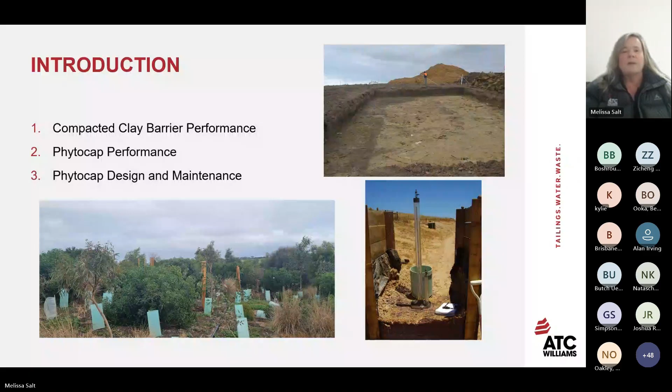Before I start though, one thing I wanted to do was to make sure we're all talking the same language when it comes to the soil water balance. So most terms are the same, so precipitation, evapotranspiration, runoff, soil moisture storage, those sorts of things. I also talk about lateral flow, which is basically the horizontal flow that occurs within the profile, and that's often caused by a change in pore space relations. So that's the term that I've got here.

The other term that I tend to use is drainage, so that D factor. So drainage also gets called things like percolation or bottom flux or those sorts of things. But basically, it's the moisture that leaves the cover and enters the underlying waste, so whether that's tailings, whether it's rock, putrescible waste or contaminated soil. So I tend to use the term drainage, or you'll also see percolation used as well.

I tend to reserve the term infiltration to basically just mean the moisture that enters from the air-soil interface, so not to confuse that with drainage, okay? So throughout the presentation, they're the sorts of terms that I'll be using.

So I'll start with compacted clay barriers. So final covers for containment of waste are often based on a barrier system to prevent the moisture leaching contaminants into the environment. The assumption in the design is that the barrier stays compact over time and that a barrier system is the best method to prevent moisture movement into an entombed waste. However, 25 years ago, this was proven to be a flawed assumption.

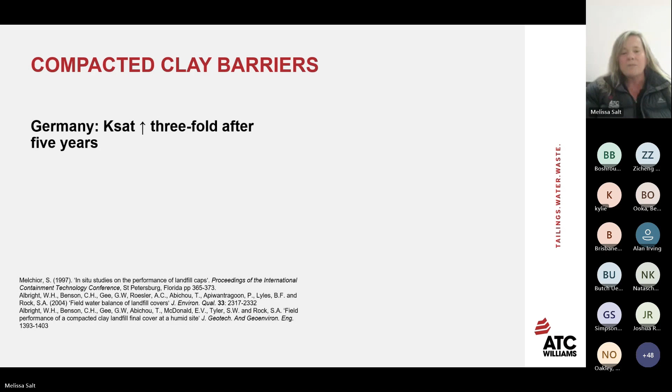So both of those were in humid regions, and both had drainage of 52 millimetres and 195 millimetres per year. So that's equivalent to about 6 to 17% of the precipitation received. Excavation was done of the Albany cap about 4 years after construction, and they found that the hydraulic conductivity had increased by about 3 orders of magnitude. They also did dye tracing studies and some structural analysis as well that showed extensive cracking and root development throughout the entire depth of the barrier layer.

Now in Australia, I actually repeated some of those tests. So the Australian Alternative Cover Assessment Program was what I did my doctoral thesis under, and that commenced in 2006 and looked at both compacted clay barrier caps and phytocaps over time. So I actually ran a series of box trials, so large apple boxes. They're about 1 metre by 1 metre by about 2 metres tall.

And I looked at the soil hydraulic changes over time, and they can occur due to, say, changes in dry density from compaction and settlement, pore size distribution changes, and particle aggregation and disaggregation. Both the Phytocap and conventional cap were planted to native grasses in this trial, and after 11 months, roots were noted to over 1 metre's depth, which means they'd penetrated into the compacted clay barrier layer.

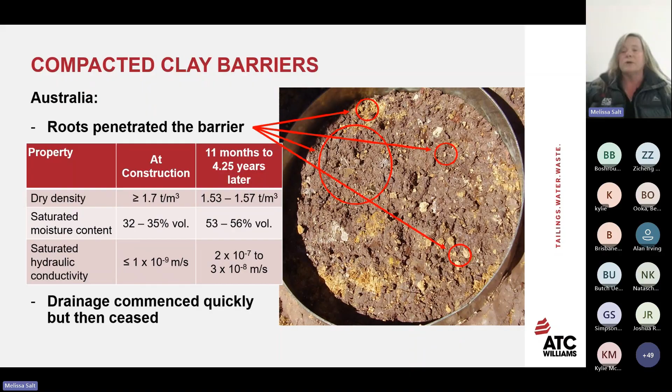These are actually combined with field trials that we did. So the field scale trials included 10 metre by 20 metre non-weighing lysimeters. One of my trial sites was based in Adelaide, and it included 600 mil compacted clay with 900 mil of growing medium over the top. From 2007 to 2014, the rainfall varied from about 360 mil to just over 700 millimetres a year.

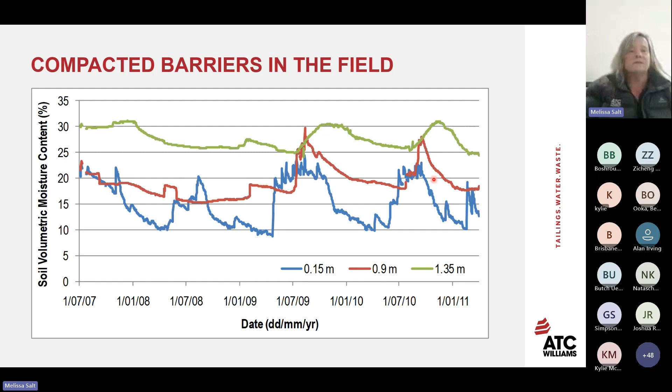So at this point here where it started to dry, the roots actually hadn't extended to this point. You can tell that because this probe here that's at 900 mils depth, that's basically sitting on top of that compacted clay barrier, that shows no sign of roots accessing moisture. But you can see by sort of the middle of 2009, so about 2 years after construction, that roots had started to get to this level and were actually drying at that point as well.

Whereas in the following year, the top of the clay actually wet up more slowly, most likely allowing any cracks that had formed to have actually sealed. So it wouldn't have allowed any preferential flow through.

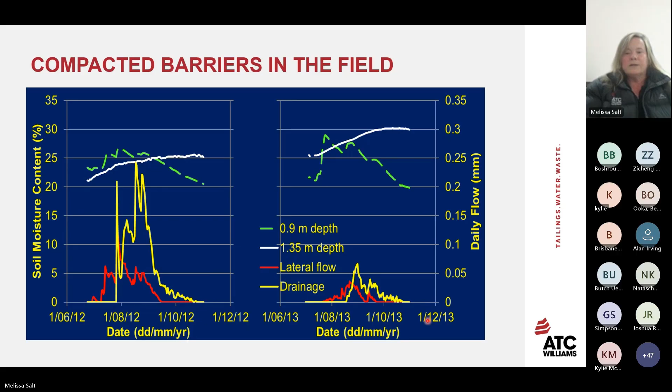In 2012 and 2013, lateral flow actually commenced before drainage, but drainage still occurred in both of these years. Now in 2012, more drainage was reported than in previous or subsequent years, even though the rainfall was actually only 462 mils in 2012. The major difference is that you can see that this compacted clay barrier is now below 25% moisture, whereas in all the previous and subsequent ones, it actually was above 25% moisture at the beginning of winter. So overall, the drainage from the conventional clay cap actually exceeded the Phytocap in both of these years.

So one thing that's obvious from both the overseas and Australian research is that the clay barrier has changed since it was placed, and this has resulted in worse than expected performance.

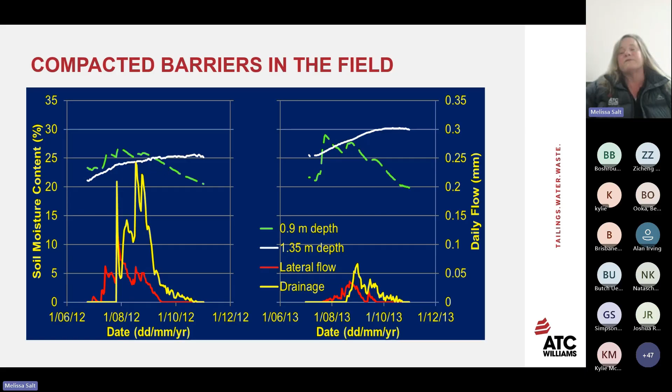So what is a Phytocap? It's basically a nature-based solution that uses natural analogues to develop a long-term sustainable ecosystem compatible with the site's proposed after uses. Phytocapping considers climate, vegetation and soil properties, as do store and release covers, but for a phytocap, the focus is not just on the water balance, but also includes more detailed soil chemistry and vegetation considerations.

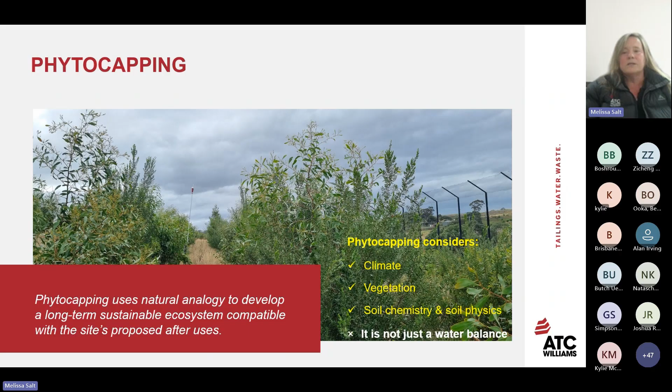So just going back to the water balance for a sec, as for all final cover for rehabilitation, the primary aim is to control that movement of moisture into the underlying waste, so to reduce drainage. Unlike most cover systems prescribed by regulators, phytocaps and store and release caps actually use the natural water balance to minimise drainage. The reason that they can do this, based on figures from Australian research on natural systems, is that ET accounts for such a large proportion of rainfall losses in a natural environment. So if we can make small changes to ET by increasing it, we can actually make relatively large changes to the potential drainage.

Now, the Australian Alternative Cover Assessment Program, as I mentioned, actually also measured water balance in phytocaps around Australia. So each used the locally available soil and the endemic vegetation, and all of these caps are around about 1.5 to 1.7 metres thick. So over the trial period, the rainfall and drainage varied markedly.

Now, I should just point out that I actually talk about a thing called the weather year. So you'll see here, these are not years as in a calendar year nor a financial year, but a weather year basically helps to keep the rainfall and drainage together. So the drainage could be delayed after rainfall by weeks or months, and hence assessing the data based on these weather years that start at the commencement of the wet season and conclude in the dry season provides a more relevant assessment.

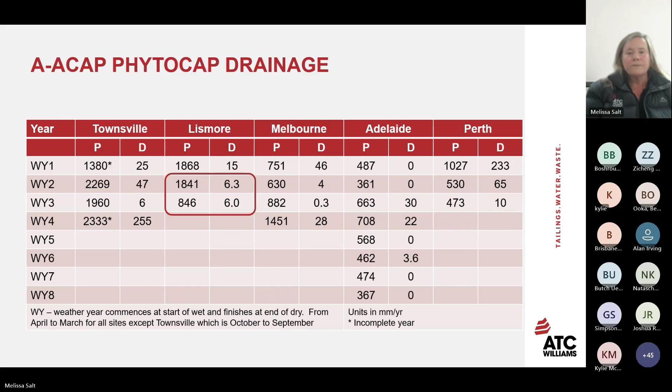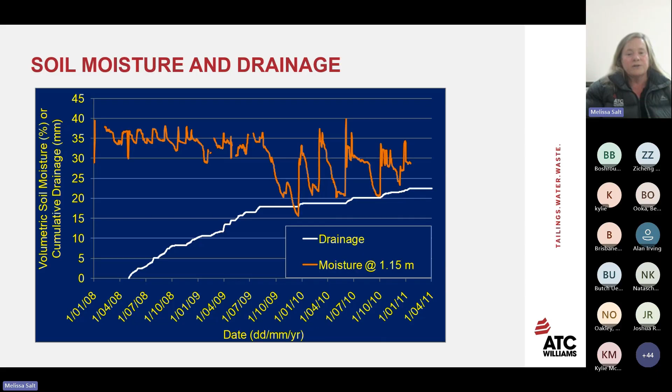So we've looked at how phytocaps, like store and release caps, can control moisture. So how do you design these to actually achieve these low drainage rates? Similar to store and release covers, the first steps are actually looking at the climate data and characterising the soil properties that we're interested in. So looking at the soil physical properties like texture and structure, so not only the structure of the soil aggregates, but also any dispersion, and then particularly as they affect the hydraulic properties of moisture retention and hydraulic conductivity.

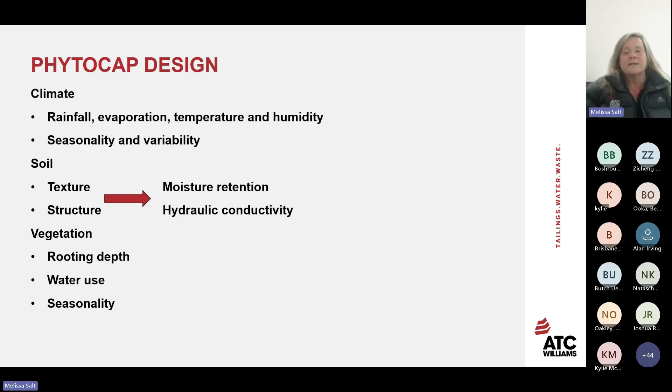For the plants, we typically define a rooting depth and water use. The metric there is often, say, leaf area index, and also some aspects around their seasonality. And then these are all combined into a water balance model that's used to help predict the drainage. It's really important to remember that water balance models are not accurate, but precise, and their power is in comparing the options. Before you start modelling the water balance, make sure you understand the data you're putting in, or as my first boss used to say, rubbish in, rubbish out.

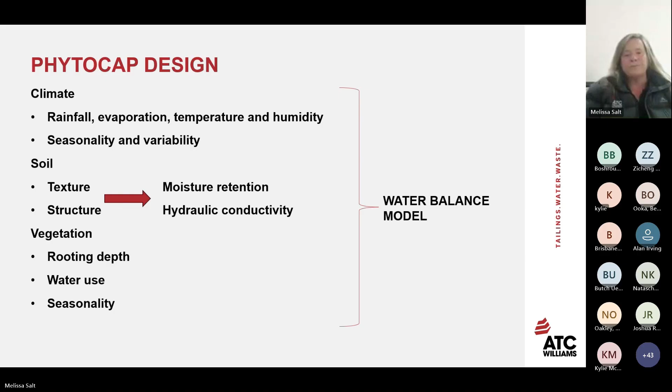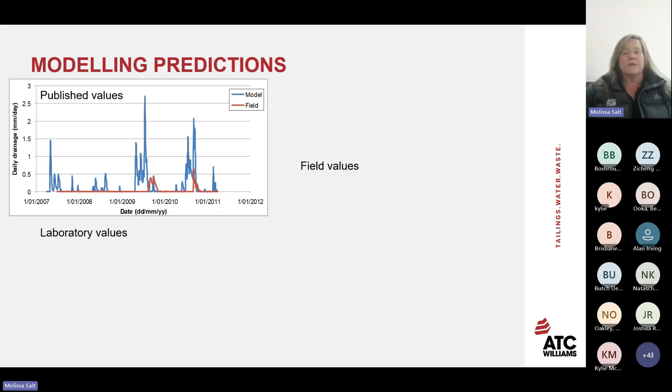So for these modelling predictions, it's important to use the most accurate data you can and recognise modelling is an estimate of reality and not the truth. We can use published data, laboratory data or field data for the water balance model. The accuracy of prediction improves with each. So laboratory data are actually a great start compared to just using sort of published values that are based around soil texture.

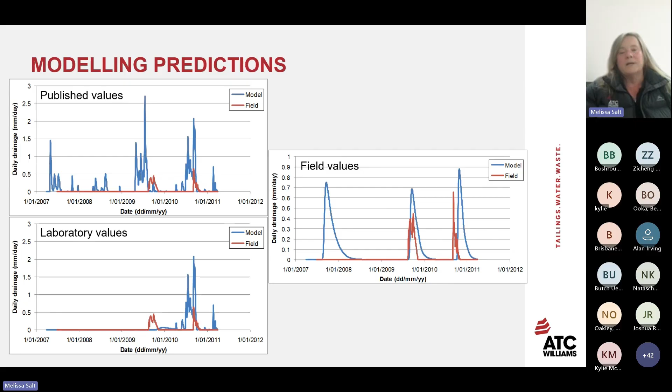Remembering though that laboratory values are often from remoulded samples and don't necessarily cover the heterogeneity that is present in a larger soil profile. So the most accurate data that you can use, which is pretty obvious, is using that field data. But as you can see, it's still not 100%. So our models have to simplify the soil behaviour, or it would take months or even years to resolve all the equations, even if that is possible. So you can improve that modelling prediction, but it's still not 100% accurate.

If you don't understand the interrelationship between pH, cation exchange, aeration and availability, then use a CPSS, so a Certified Professional Soil Scientist. The values in the Hazelton and Murphy book are great for describing the soil, but not for interpreting it. And it is mainly geared around agricultural soil. So they're actually looking at sort of optimum soil conditions, something that is rarely available from an overburden stockpile. It is really important to get the right people on the job and to listen to their advice.

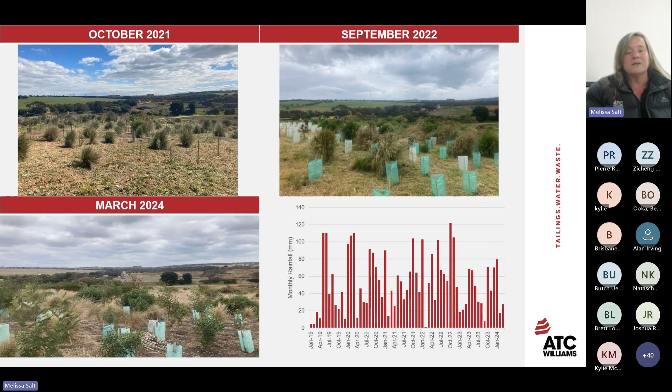So weed control, additional plantings and supplementary irrigation since that time has resulted in a massive increase in the presence and diversity of the native vegetation. The drainage from this site in the 23-24 weather year was 0 millimetres, though rainfall occurs throughout the year with an average of over 50 millimetres a month. So a really great improvement by just getting that vegetation right.

So talking more about vegetation, that other major piece in designing a Phytocap is that vegetation. The selection of the vegetation has to be aligned to the after use, but it also has to be suitable for the soil. Although the overburden is the natural soil of the area, it is actually often a mix of much deeper units and hence may not have the same properties as the natural areas surrounding. Also, any impacts from the underlying waste can become important in plant selection. For example, gaseous impacts from things like putrescible waste can have a similar effect to waterlogging as they reduce the oxygen content in the soil.

This means that the vegetation you select may actually be, say, from a swampy area in the native environment and not the woodland that actually surrounds your site, so that you can ensure that you're still using local species, but that they will survive. The most important factor of all, though, is variety. Not only does this result in a more natural environment, but also helps to protect the site during the myriad of conditions experienced, whether that's related to weather, fire, or herbivores grazing.

During the establishment phase, I can't mention the importance of weed control enough, though I have tried to here. Native vegetation establishment is slow and you need to allow at least 5 years of more intensive maintenance to ensure their survival. This might seem like a long time, but it's actually more expensive to replant native vegetation than to invest in the maintenance. So some order of magnitude: the cost of planting vegetation is around, say, $200,000 for 10 hectares, and that can pay for a lot of labour for an experienced vegetation contractor, the cost of which is typically around $20,000 a year. So an overall saving over that 5-year period of around about 50% compared to having to replant that vegetation.

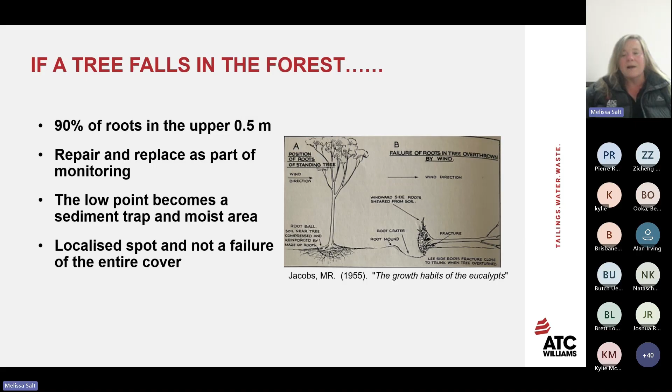Also, when trees fall over, you go back and repair and replace as part of typical maintenance, the same way that you would for any erosion. If it occurs outside of the maintenance period, then the low spot will become a sediment trap and will start to fill up, but it also becomes a moist area where new seedlings will grow. It's important to remember also that this will be a very small portion of the cap and not failure of the entire cap. If you have a variety of vegetation, you will still have shrubs and grasses to use the moisture whilst a larger tree re-establishes.

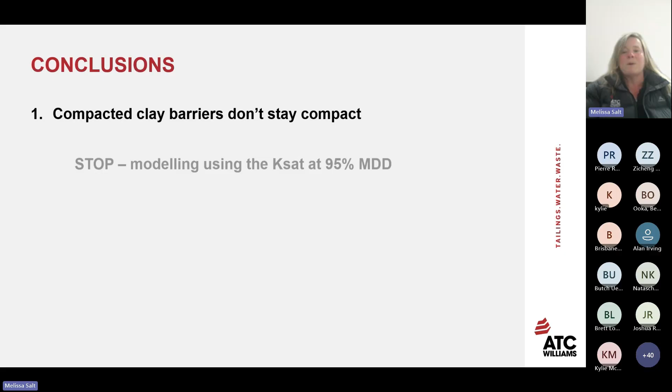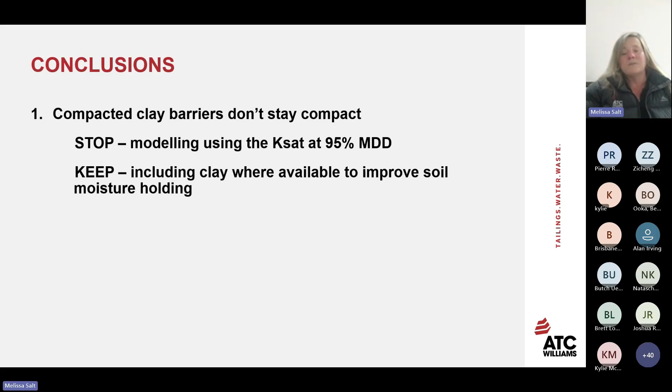So my take-home messages really are to think about what you are modelling and if it will really perform like that. Clay barriers do not stay compact, whether you place them under a capillary break, below a metre of soil, or do excessive spraying, they don't stay that way. So why not place them in a way that you can use them actually within a Phytocap? Phytocaps are really an amped up store and release cover.

You need to consider more aspects during design, so it does cost more to analyse and assess the soil and select, source and establish the right vegetation species. But the returns are in the lack of rework and the reduced risk of failure, which could potentially lead to fines due to off-site pollution from sediment or from the waste itself. Make sure you get the right people doing the right job and listen to them. The long-term peace of mind is worth it, both in terms of money and outcome.

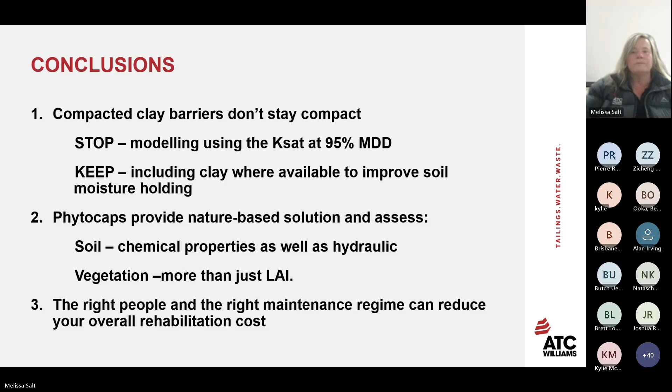Thanks so much. I'll hand it back to you, Kylie. Thank you, Melissa. Okay. Can do. Yeah, excellent. So that was a really fantastic presentation.

And I have questions myself, if you've seen any examples where this has been applied in areas where the soil is very rich in clay or similar, and whether this could be used in areas where we're potentially rehabilitating tailings facilities from wet tails. So just want to see what types of materials have been used in the landfill capping process for the phytocaps.

So we've used a really broad variety of materials. Even if I just talk initially about the Australian Alternative Cap Assessment Program. For that, Lismore was basically a clay soil, basalt derived, so volcanic, shrink swell potential, that sort of stuff. So that was quite a clay soil. I've got another site that has a similar soil to that, all the way through to much sandier measures. The Melbourne site was a mixture of a sandy loam soil with a really low grade compost, mixed throughout the profile to help improve its moisture holding capacity.